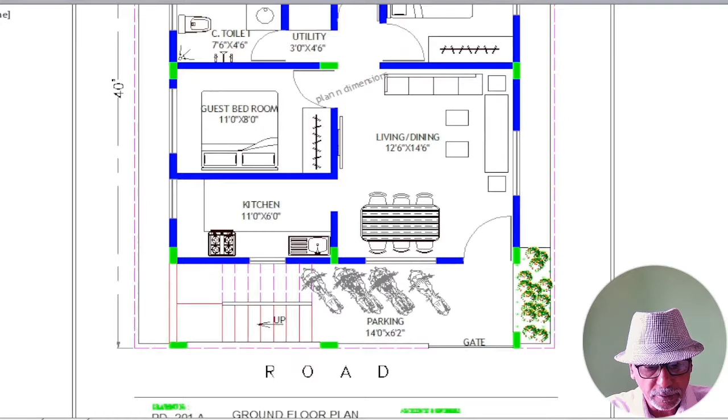Now let us see. This is the main entry gate in the northeast, and you can observe a parking place for this two-wheeler and a staircase going to upper level. This staircase is extended till the site edge. Now we have a main door entry in northeast.

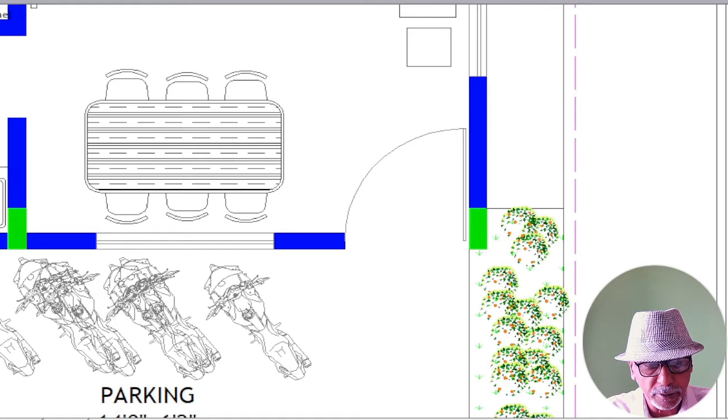Once you enter, you have this living cum dining. You can observe this furniture layout. It is in north position.

Moving towards, we have a kitchen in southeast corner. Then coming back, we have one more bedroom as a guest bedroom, 11 feet by 8 feet. And moving towards

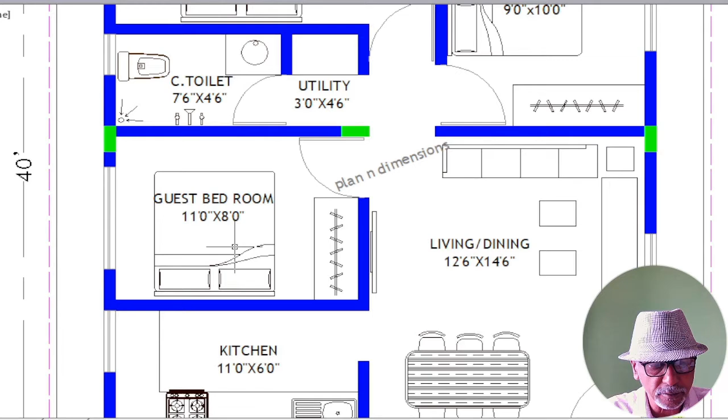southwest, we have this master bedroom, 14 feet 6 inches by 10 feet with attached toilet. We have one more bedroom towards northwest. And for these two bedrooms, we have this common toilet.

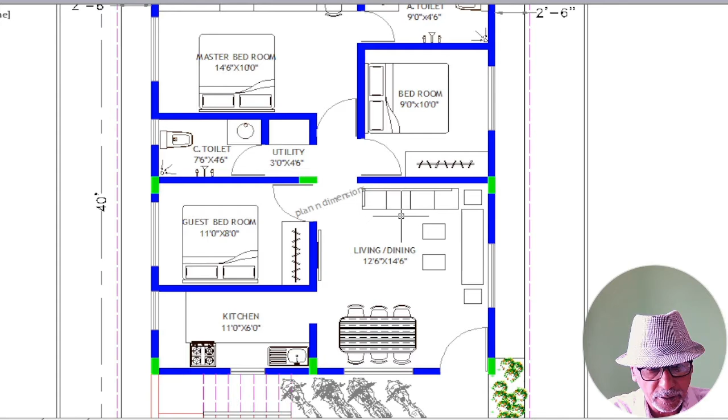Friends, now if you observe, it is as per vastu, since all the room positions like kitchen, bedrooms, toilet, everything is as per vastu guideline. But as per my view, this is not as per vastu. It is not 100% vastu. Come on friends, now let us explore what I have committed to follow - 10 guidelines to achieve 100%.

Friends, now let us explore this plan. The plot is 30 feet by 40 feet facing east. Once we know the plot size, then we have to fix the aya for this plot. Aya for this plot is 25 feet by 33 feet.

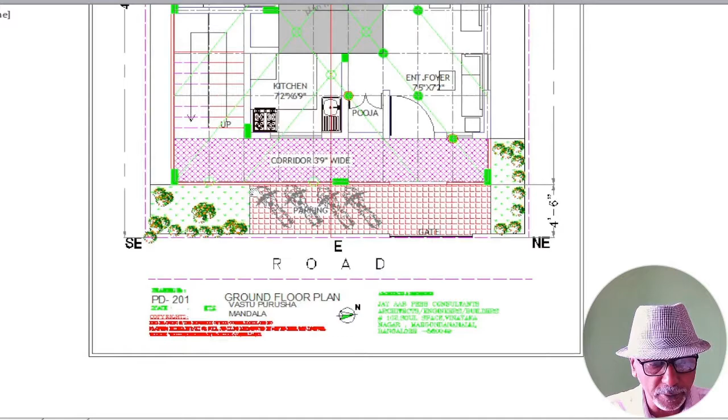Once you have fixed it, then we have to fix our setbacks, since we know that towards north and east we should have more space. So we have 3 feet towards north, 2 feet towards south, and coming back to east portion, we'll have 4 feet 6 inches, and then towards west, we will have 2 feet 6 inches.

Friends, after fixing this setback and aya, care should be taken that no projection in this setback, either it is a structure or balcony - whatever projection is there, it is not recommended since it obstructs the flow of energy. So this point you have to note down.

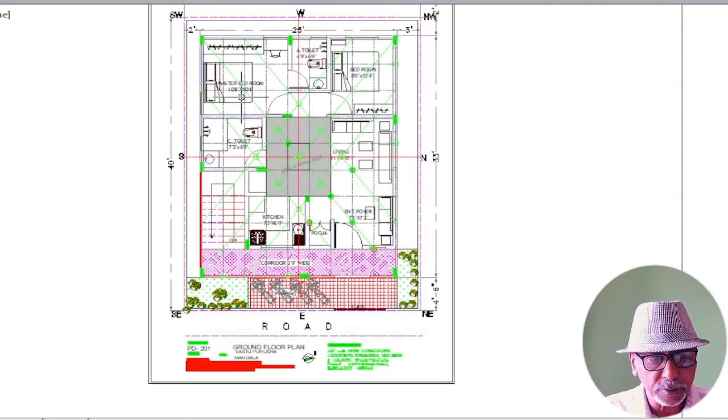Once you are with the aya and setback, then we have to go for this vastu mandala, dividing into 9 equal parts on either side. Once you have done it, then fix your wall.

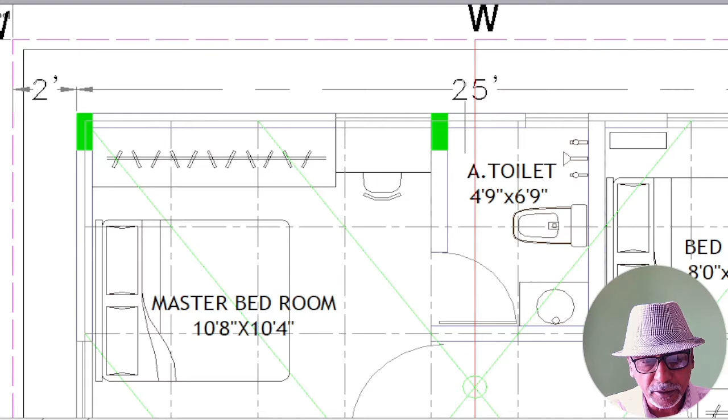Here, in my last video, I have explained about energy lines. You can observe all this is energy lines. So I have taken this wall in line with the energy lines. All the walls you can observe I have taken in line with the energy lines.

Then you should understand about marmasthanam. So these circles which I have highlighted, all these are marmasthanam, where we have to take care that no columns intersect in our marmasthanam. So this point also you can observe we have followed.

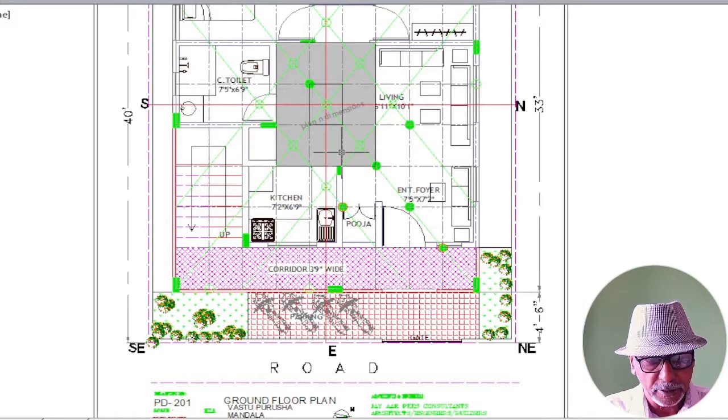Then the next point, everyone will ask where we have to keep the main door. See, this is the main door. If you observe 1st, 2nd, 3rd segment, I have this main door. This is the ideal place for the main door.

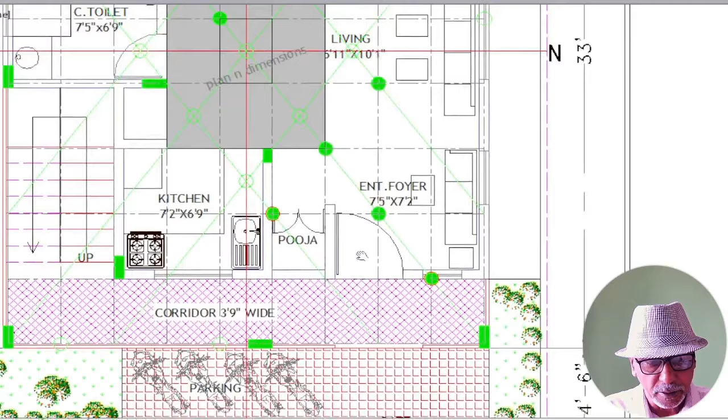Now moving towards, we have this puja. It is in the 4th segment, very ideal place for this puja. Then you have this kitchen area. It is in southeast.

Again, if you see this hatch portion, this is brahmasthanam, where we should not load with any furniture or any equipment, and at least we should have this space open to sky.

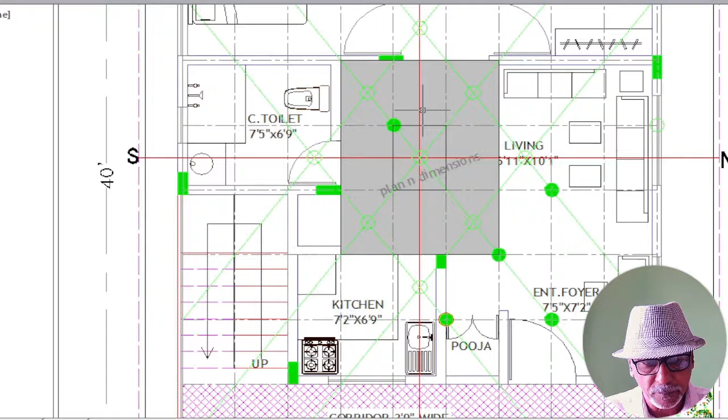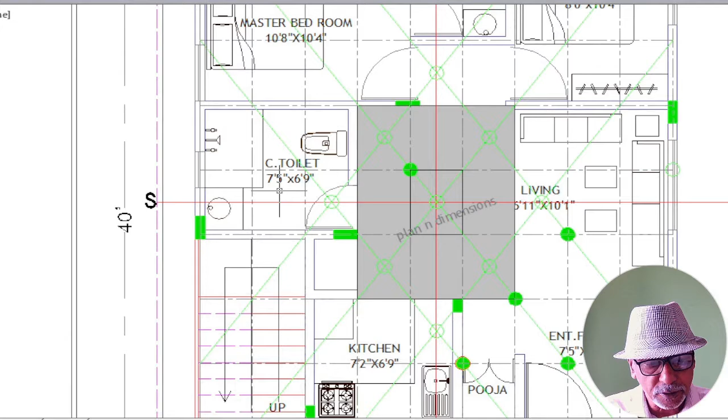Moving towards southwest, we have this master bedroom with attached toilet. You can see the furniture position. Then we have one more bedroom towards northwest. For this, we have a common toilet in southwest. All this has been followed as per vastu.

Now we will see how, after applying this, our plan looks. Let us move forward.

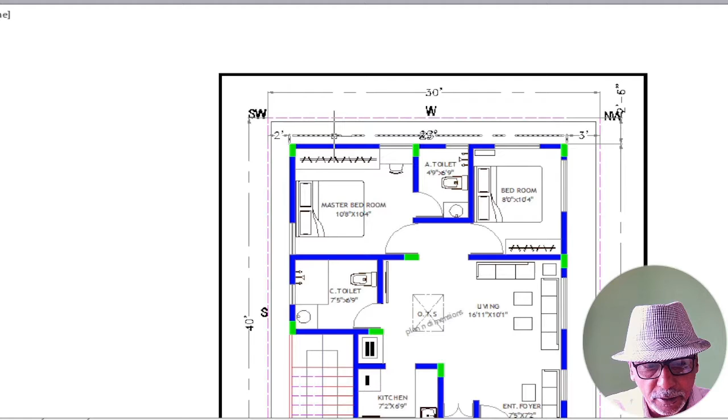Friends, now let us see how we have defined our vastu principle in our plan. You can observe that it is 30 feet by 40 feet, we have not gone for any projection beyond our area, and we have left our setback free.

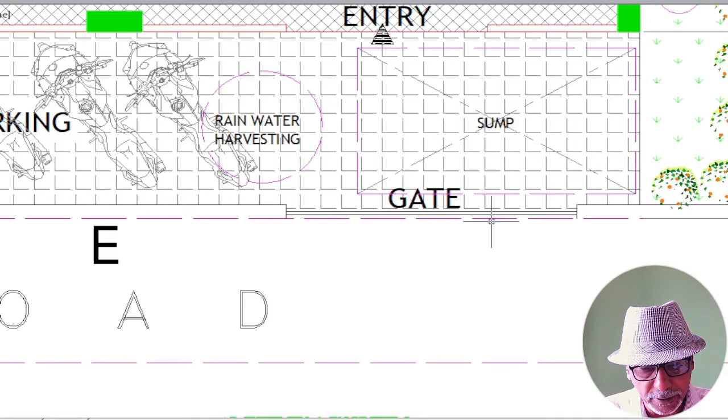You can observe this. Next, let us start from our main entry. Friends, this is our main entry gate, and as we have left this 4 feet 6 inches, we have ample space for two-wheeler parking here and some greenery in these parts.

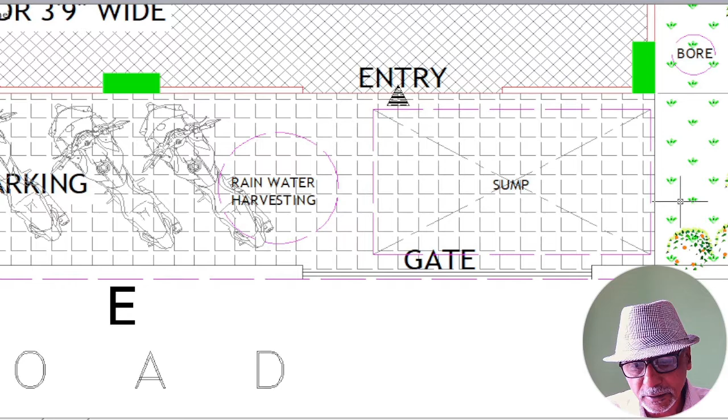Friends, I have also indicated the rainwater harvesting sump and borewell position. But you should remember that when you take a diagonal of your plot, the sump or borewell or this rainwater harvesting should not intersect in this line. That point you have to remember.

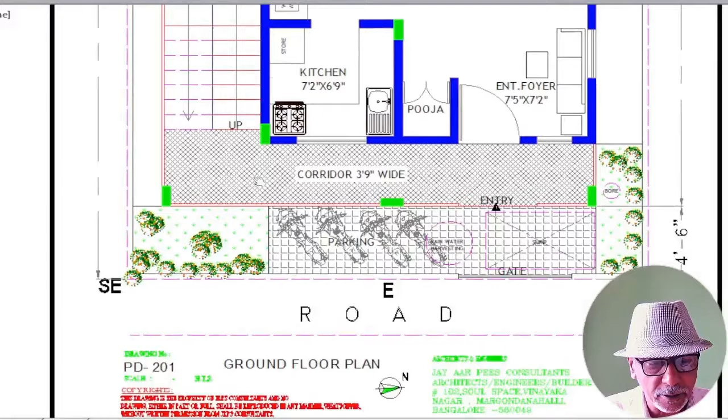And when you come here, this is an entry to our building, one step above this area, and you can observe this is 3 feet 9 inches wide. You can use it as a sit out or corridor, because this has been provided for access to our upper floor.

You can observe we have this staircase in the southeast corner, and I have shown it like this. It is in anti-clockwise direction because I don't want to load this area. To avoid loading this area, we have to go for an anti-clockwise direction.

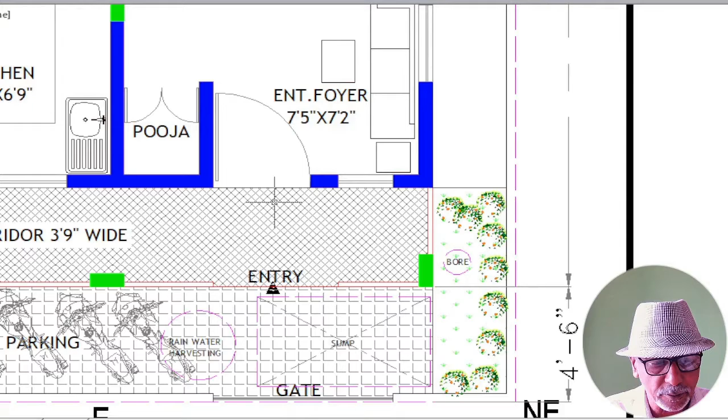Now coming back, this is our main door entry. Once you enter, you have this area as entrance foyer where you can entertain your guests and friends. This entrance foyer is 7 feet 5 inches by 7 feet 2 inches.

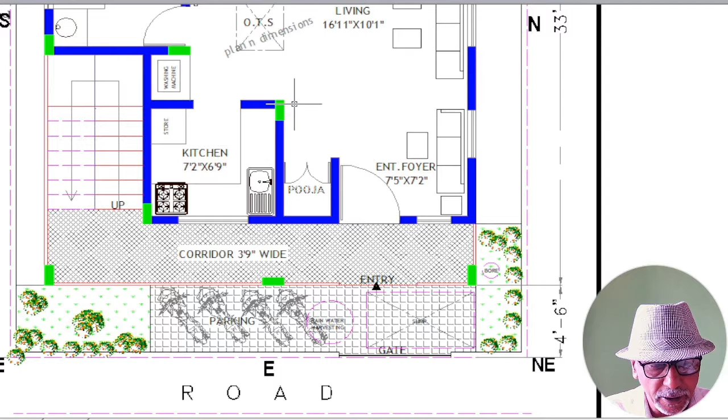From this entrance foyer towards the left, you have the puja, and in front of the puja, you have ample space. You can use it for your prayer or meditation, because this area is very suitable for this puja.

Now, if you come towards this area, you have the living area. From this wall to this wall, and from this wall to this wall, this is your living area, 16 feet 11 inches by 10 feet 1 inch.

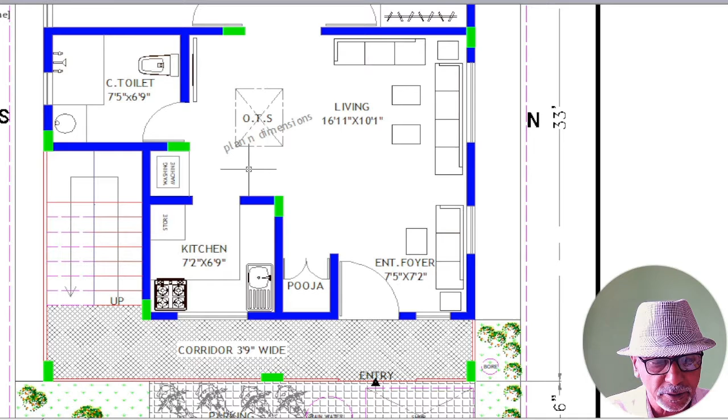And this is Brahmasthana, friend. So I have not shown any furniture in this area, but let us use it for our walking space to move to different areas, and at least let us leave this area open to sky. This is the Brahmasthana. You should be very careful not to load anything in this.

Now moving towards this southeast corner, we have this kitchen. You can observe this is the platform towards north and east wall. In the southeast corner, you have this cooking range. Northeast, you have this sink. Other areas you can utilize as per your requirement.

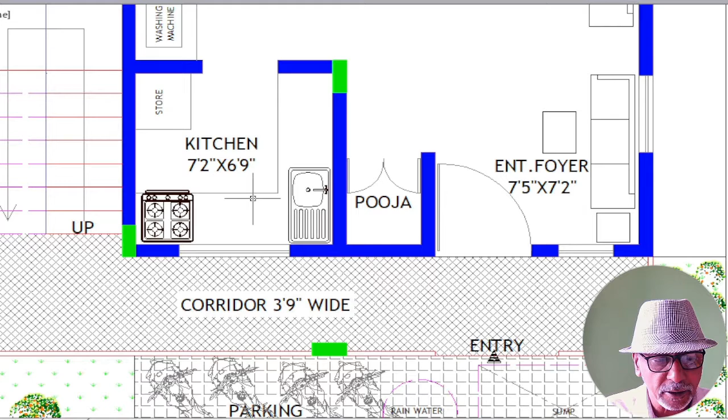And in this corner, you can have your store shelves. You can observe this, we have a niche here. This area we can utilize for washing machine, a very ideal place for washing machine.

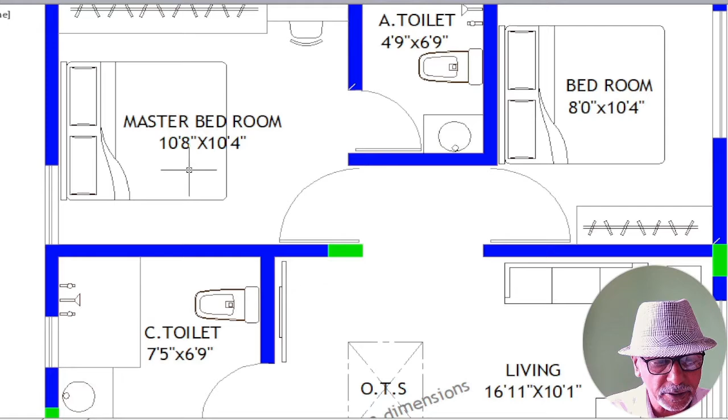Moving towards the southwest, we have this master bedroom with attached toilet. The master bedroom size is 10 feet 8 inches by 10 feet 4 inches, and you have this attached toilet 4 feet 9 inches by 6 feet 9 inches. You can observe this furniture layout, everything is fixed as per vastu.

We have one more bedroom, 8 feet by 10 feet 4 inches towards northwest, very ideal for children's or guests.

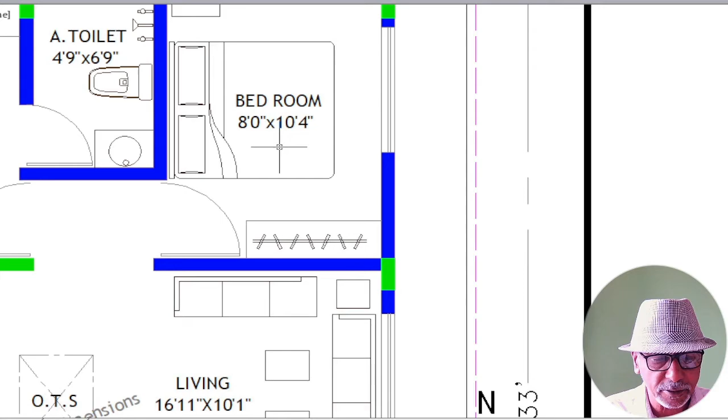For this bedroom, we have one common toilet in south-southwest. Quite spacious, 7 feet 5 inches by 6 feet 9 inches. You can see the commode facing towards south. Either it can face towards south or north. We should remember this point.

Friends, now after applying all our vastu guidelines, you can see how you feel. Let me expect marks from you. The first sample which I have shown, do you like that plan or this plan?